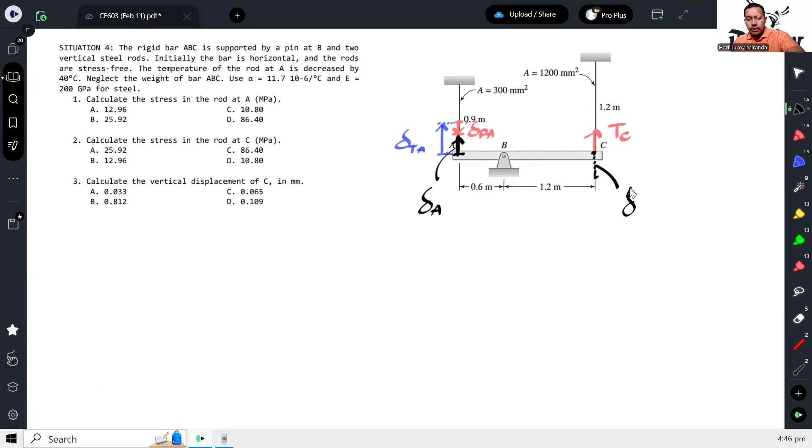So from the figures, we can see that the deformation at A is equal to the thermal deformation of A minus the axial deformation of A. Well, this is based on my assumption na nagkaroon muna ng contraction, tapos hihilain pabalik ng tension nitong A. Tapos dahil sa tension na resistance niya, magkakaroon ng elongation dito. And then, yung deformation sa C is just purely axial kasi wala namang change in temperature doon.

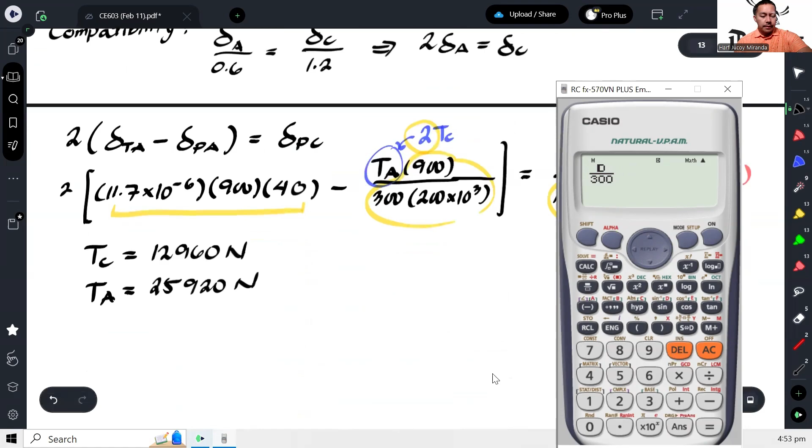So that gives me 86.4 and that is letter D. For the stress in C, this is 12,960, and the area at C is 1,200. So that gives us 10.8 megapascal and that is again letter D. And then lastly, calculate the vertical displacement of C in millimeters.

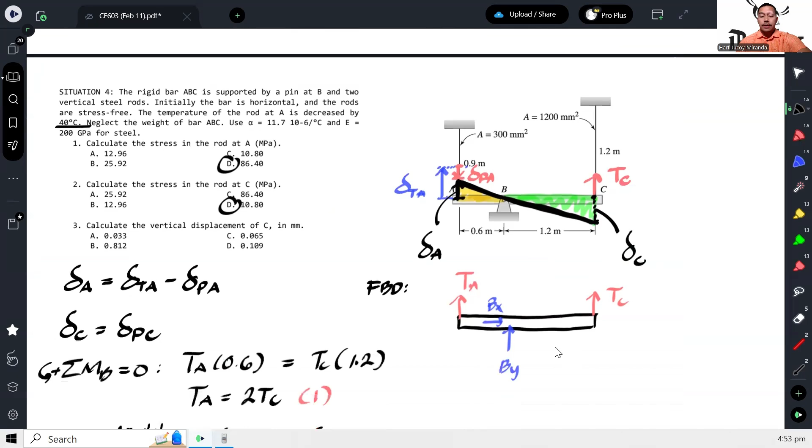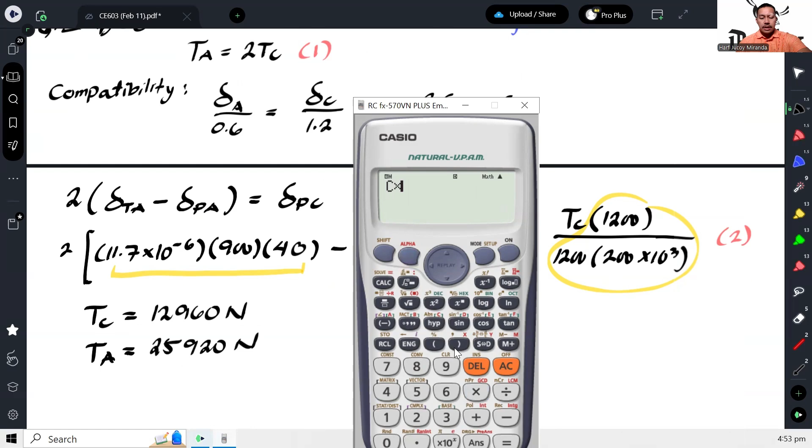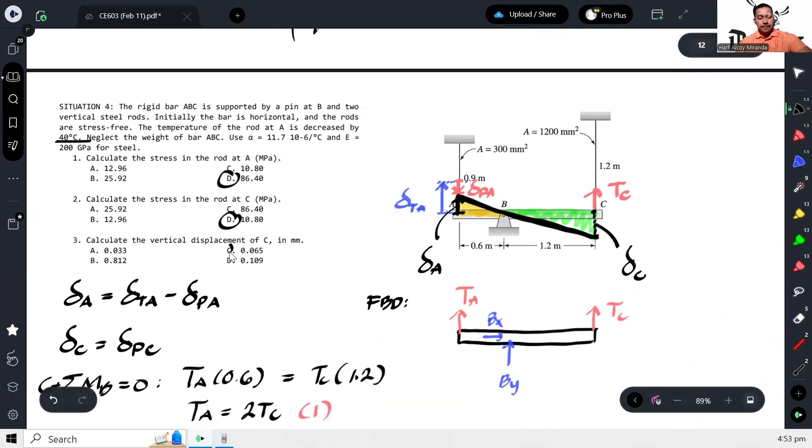Okay? And that is your vertical displacement, 0.065. All right? And that's how we solve this specific problem.